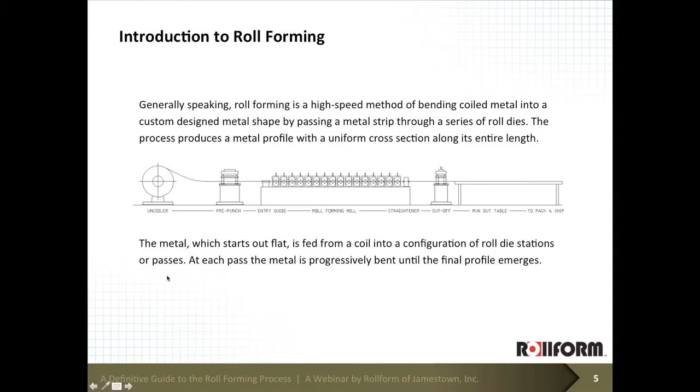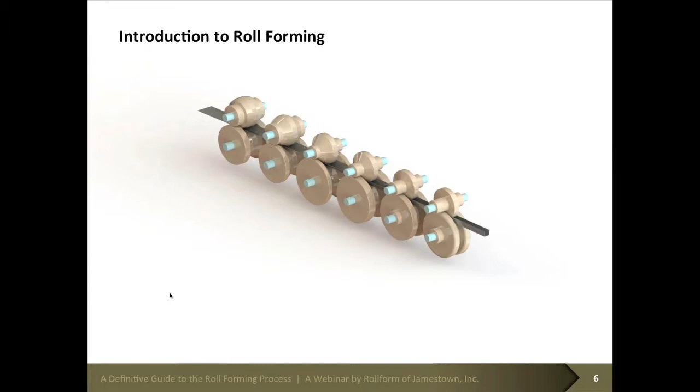Being segmented also makes handling easier for the operators. When they're going to put these in and out of a machine, the individual segments are lighter than if you had the whole top roll to put on the shaft as a single piece, and the bottom too, of course.

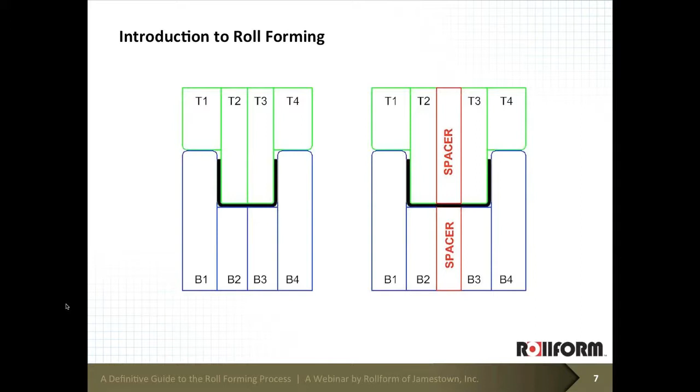It's a proprietary design, uses a servo-driven slugless cutoff. Basically, for an open shape, we can use a couple of steel plates that have a wire EDM through them that matches the profile with minimal clearance around it, so that when the die fires, the press fires, there's a shearing action that takes place, and it removes or cuts the length, the finished piece, from the roll form product, cuts it to length, and produces no slug, so there's no waste, and minimal burr, which is always a good thing. It's very intelligent, very efficient.

The die sits at its home position until it's signaled by the controls to go out at line speed to the correct position, and then very accurately cut off the product to the correct length. And then it'll come back to the home position ready for its next cut. So think about how efficient that really makes it.

Other than having to load coils or perhaps move loads of finished product out of the way, the operator really never has to shut the machine down. It's a continuous operation, flying cutoff, parts go on the load, and ready to just continue with his production.

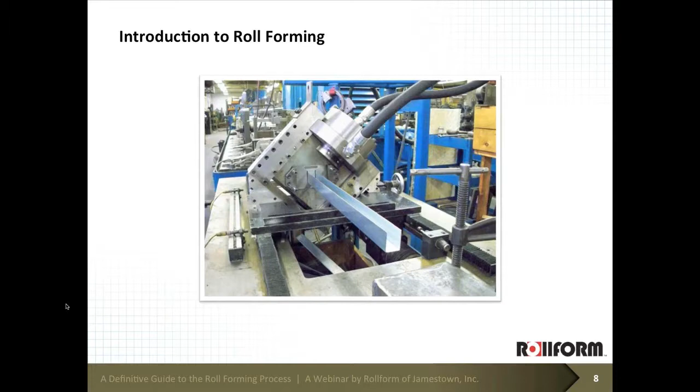When we're changing part lengths, it's really something that we can do on the fly. Quite often we can just put a new length into our controller for the line and go from 48-inch parts, let's say, to 60-inch length parts without moving a physical mechanical stop or anything like that, because we're running a continuous production from coil and cutting it to length.

Material handling and saving on floor space, they both kind of go hand in hand. If you think about the line that we just described, a coil of steel goes on the entry end of the mill. Operations take place in the pre-punch, perhaps forming through the mill, perhaps additional operations in a post-punch and or the cutoff. And out the end comes a part that is a net part, basically finished with all its features included, generally speaking.

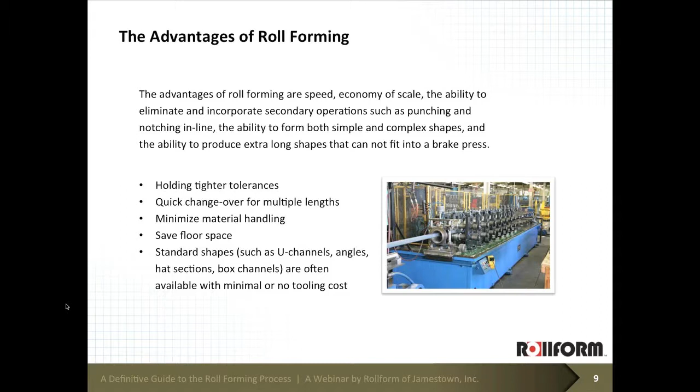When you think about what goes on here, at times for very simple shapes, we can set up a machine in a few short hours. But more complex shapes, you may have a day or even 2 days at times into a setup. So if the production quantity is very small, all that setup time, along with any setup scrap generated to perfect the part during the setup, has to be amortized across a small production quantity, which can drive the per piece price up.

The other thing that's a factor here is potentially higher tooling costs. For a custom shape, that could mean an entirely new set of tools, which could be expensive.

On the other hand, many times when more conventional forming and fabricating methods are used, there are multiple dies and multiple tools that have to be built, each one in its own press and its own operation. Where with roll forming, we can quite often incorporate a number of features in our pre-punch operations, either by gagging, actuating features in and out of the die as needed. In some cases, we have multiple stations in a single die that are individually activated by hydraulic cylinders. So higher tooling costs, not strictly true, but at times it is. That's one thing that would have to be taken into account.

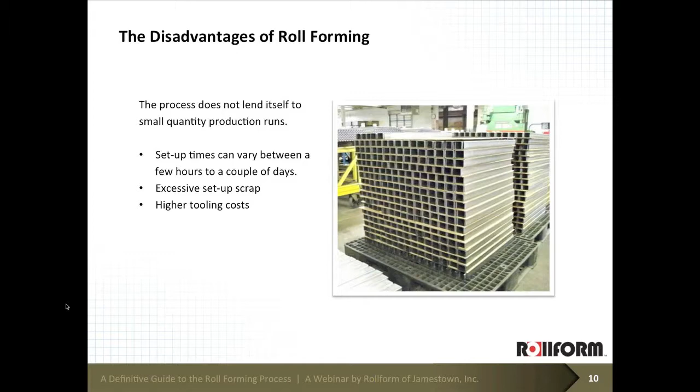And of course, there are times certain products just can't be produced economically other than by roll forming. So the good thing is just let us take a look at it and see where we can help you with that. And we'll hold inventory when it makes sense.

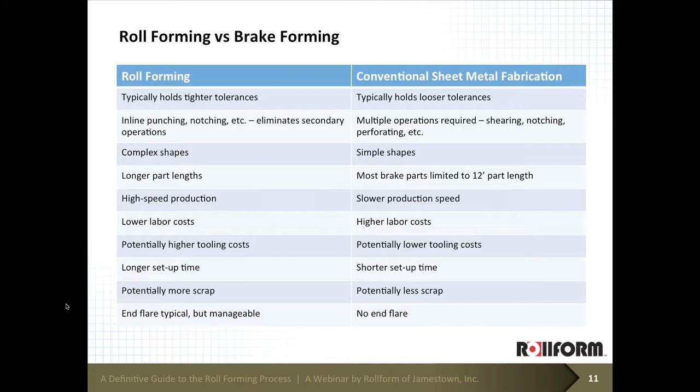We're going to go on now, Alan, to the next section here, guidelines to consider. These are some things that if you're designing a product and looking to have it roll formed, or perhaps you've got an existing product and you want to convert it to roll form to take advantage of the efficiencies of the process and reduce cost, these are some things you should take into account.

Now, these really are only rules of thumb. They're only guidelines, not hard, fast rules. Pretty much everything that we're going to discuss over these next several pages, there are exceptions to them, and many exceptions. So all we're saying is take these things into account, and where you can design around these guidelines, you're going to be benefited when it comes to roll forming your product.

So let's take a look at the first one. This is a wide panel, what you might think of as like a roofing panel, metal roofs. You see those quite frequently on residential and commercial buildings these days. I saw a metal roof on a building yesterday when I was out walking around the local community college, and what I saw when I looked up at it was waviness, or oil canning as it's commonly called, up the center of each of those metal panels. That's very common with wide panels. You get much over 5 or 6 inches, and especially in the lighter gauge stuff, the center is going to wave.

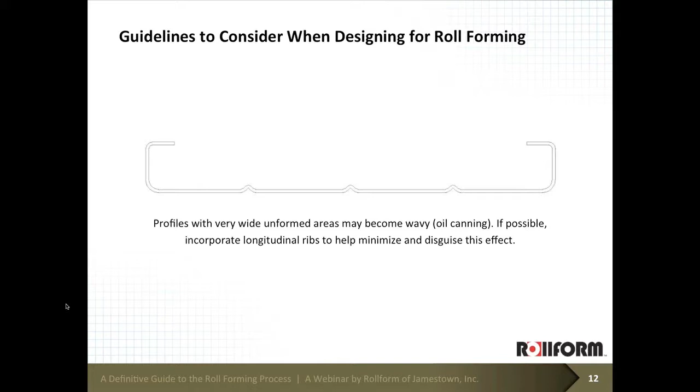What we're showing in this illustration is a J channel. It could be a cap for a molding or a panel. Quite often, all the forming on this type of product is done only on one edge of the stock, and the other side is left unformed. Depending on your use, you may see the unformed edge get some waviness or buckling to it. If we can add a safety edge, a little hem, or even a slight bend to that, it tends to take care of that waviness along the edge. Depending on your usage, maybe it matters, maybe it doesn't. If that unformed edge is hidden in the final installation or assembly, then perhaps it's nothing to worry about.

J-channels are roll formed all the time. However, if it shows, then perhaps at least consider putting a slight form on the edge, where in the bottom illustration we said not recommended. We'd like to see you try something similar to either of the options shown up above there.

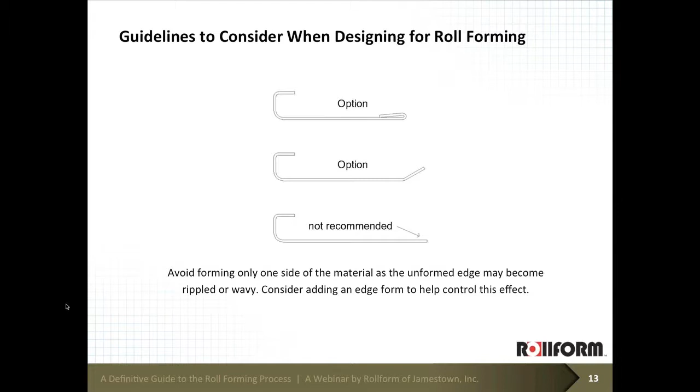Our next page, we're showing basically an end view, a cross section of a little box channel, and the arrows point into the bottom bends here. We'll call them blind bends. What can happen is those bends—it's exaggerated here in this drawing—but they can actually become a little less crisp or softer than what are formed at the top of this part.

There are ways to work around this. If we know the bottom bends are critical and need to be very crisp or square, there are things we can do in the tooling to make that happen. On the other hand, if it's not important to you—say this is just a stiffening product and it's hidden from view—maybe those larger radii don't matter in your particular use. If they do, though, be sure to call that out so we can make some provision for that.

All that happens is at the point where the top bends cover the bottom bends, you no longer have access with the male tool directly to the inside of the bends. They tend to round out and get soft. Again, it depends on your application whether this is a big deal to you or not. The prime thing here is just let the roll former know whether that's something you care about or something that really doesn't affect the final use of your product. It's a good discussion to have.

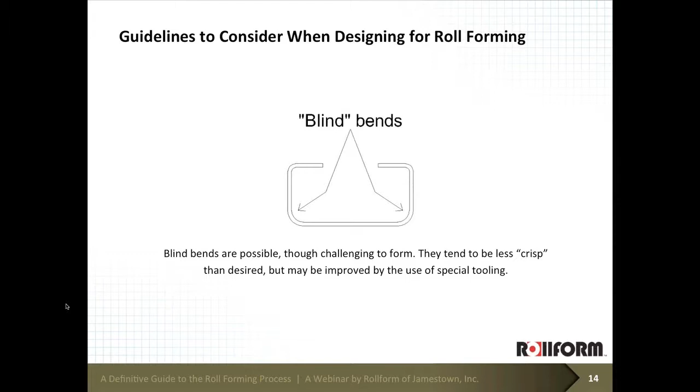Let's move over to our next page, Alan. You'll see here a couple of different variations on a theme, closed channels. The top is a rectangular square tube with an open or butt seam. The lower one is basically a variation of that, where we end up with two rectangular tubes at the extreme left and right of this roll form section.

When we looked at our slugless cutoff, the servo-controlled slugless cutoff earlier in this presentation, that's a nice open shape, and we can put a set of crop-off, shear, slugless—whatever you want to call it—plates into use to cut those products off. This product, either one of these, would not lend itself to that because there's a hollow area that we can't get any tooling to support our cut. What will typically happen is there will be some deformation from the cutoff, especially when the blade enters the part. Imagine a blade coming down into the seam of that top square channel—it's going to deform the top until it starts to make the cut. Something similar happens with the bottom one as well.

The one at the top, we actually have a customer we make this product for all the time, and we're running 20-foot lengths for them, which they recut by saw so they can cut off the part that is damaged beyond their use. They just take into account that there's going to be some of this product they can't use because of the crushing of the end when it's cut.

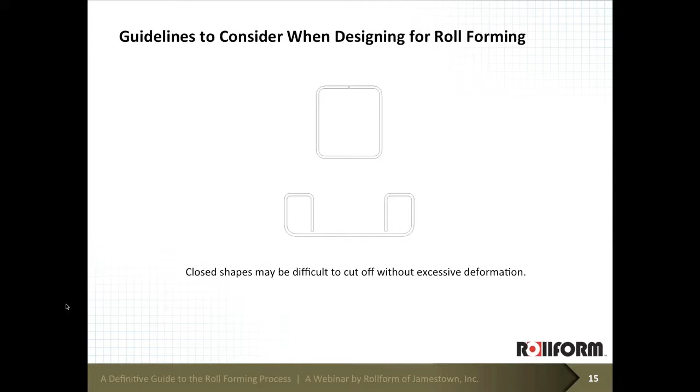Our next page, here we see a nice open section, kind of the opposite of what we just talked about in the last shot. A nice deep U-channel, which certainly is a roll formable product. What you get into here as the section gets deeper, you also get into higher tooling cost.

Imagine a wide strip of material that would be required to make this channel. If this is 6 inches deep and 2 inches wide, you're looking at approximately a 14-inch wide strip. Well, you've got to have roll tools that cover that and start the bends, and it takes more passes to finish these long legs than it would if the channel were shorter. So generally speaking, the deeper the product, the more expensive tooling gets.

Sometimes you just don't really have a whole lot of choice. You need a deep channel, you need a deep channel. But many custom roll formers are not going to have necessarily a set of roll tools that will go indefinitely deep. Here at Rollform of Jamestown, we generally limit ours to 3.5, perhaps 4 inches, because of the mills that we have here.

So you're also limiting your options on what existing universal channel dies may be available. Now, all that said, can this be roll formed? Yes, and it is every day. Just deeper means more expensive from a tooling standpoint.

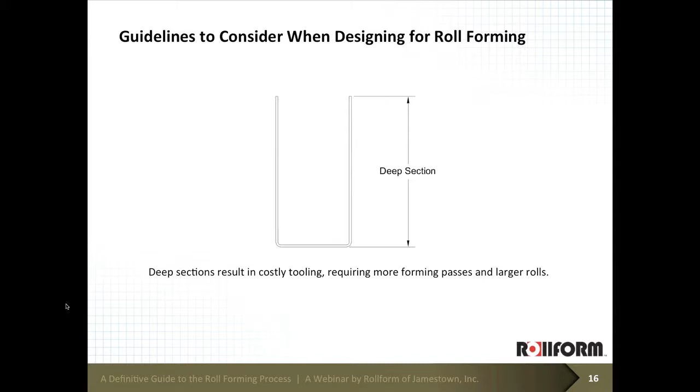Next page here, just some things to keep in mind when it comes to tolerancing your drawing. Like any fabrication process, roll forming works with coiled material or blanks in some cases, but we still have the material thickness tolerance to take into account. Typically what happens is roll forming forms the metal around the male tool, which is the inside of the part, and so inside dimensions are actually more consistent, whereas the material thickness variation shows up on the outside of the part. If you can, and it's practical, to dimension to the inside of your channel, you'll find that the variation is much less than measuring to the outside.

Now, having said that, there are things we can do. If it's an outside dimension and that's really critical to you, we can put control passes in there to control, let's say, the width of this channel, regardless of the material thickness variation. We just need to know that up front and have the part toleranced appropriately so that the tools and the process meet your needs.

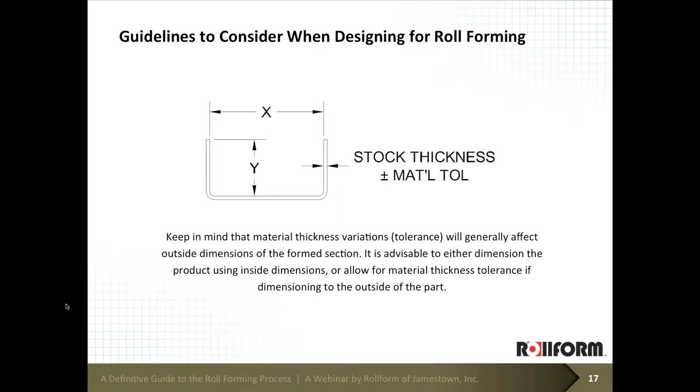Next page here. This is one that's pretty important when it comes to roll forming. Quite often you'll see a C-channel or a little box and some short returns, or ears as we often call them. There's kind of a limit there. If you can maintain a minimum of 3 times material thickness as the dimension for the straight segment of the ear, it makes a formable part.

If it goes less than that, it becomes very difficult to form, especially as the material thickness increases. Just imagine that you're actually using, in effect, a lever to make that bend in the rolls, and there's just not enough to make the bend. It won't grab it and make it form crisply and evenly. Sometimes it'll even damage tooling if it's heavy gauge or high strength and the bends are just too short. So here's the rule of thumb: 3 times material thickness as a minimum on the straight segment of any returns.

Even if we can make it with a bend less than that, it's going to be real hard on tools and shorten their life. There'll be a great deal of tool maintenance and repair that runs into some money, and of course, as it wears, it's harder to maintain the integrity of the part.

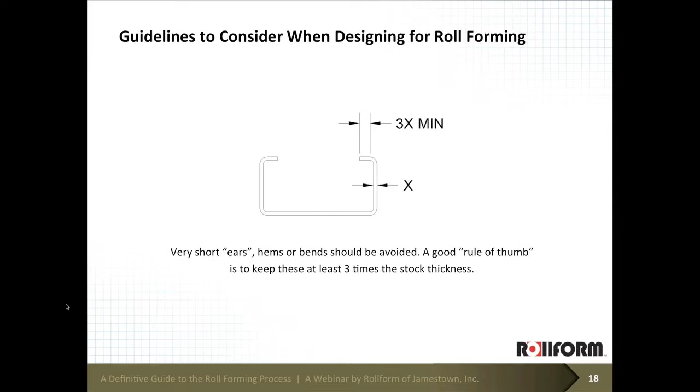I saw a job once where we formed it up very close to what's demonstrated here. When it exited the last pass, the whole thing opened up so it was nearly flat again. Can it be done? It can be, but quite often rather than one single true radius or arc, it ends up being a series of shorter bends and lines, almost like faceted, as opposed to a true radius. It's generally a series of shorter straight bends that will simulate an arc. So if it's high strength material, something with a lot of spring to it, stainless...

Pretty tough to do. Just so much overforming is required that it's very difficult to make that unless it ends up being faceted.

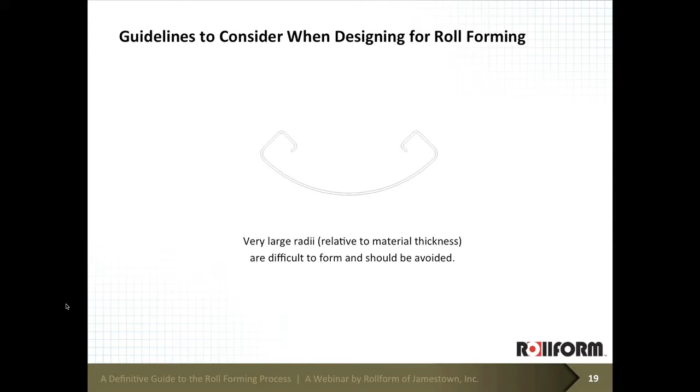The problem is not that you can't make the part. They are certainly roll formable, but it's very hard on tooling, both in tooling production. If you can imagine, it would have to be quite a narrow, skinny slice of tooling that would have to go down inside these channels to maintain the opening while the part's being formed around it. Those tools are challenging when it comes to heat treating. They like to warp, they're that thin. They're also difficult as you get into heavier gauges to keep from fracturing or cracking.

We have this one particular job where that's what happens. Every few runs we have to replace some of those center slices because they fatigue and crack. There's a lot of side pressure, not much tool left there, so they crack, and it just becomes a consumable part of our production run. We keep spares on hand.

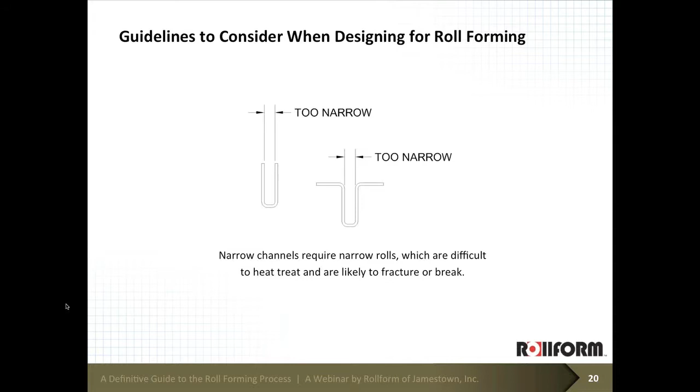So, very narrow channels - yes, it can be done. Just be aware that there are some tooling issues involved. We will certainly work with you to work through whether the material gauge, the material properties, and the channel width are appropriate, if they all fit together.

What we're recommending is to keep these features as much as possible away from the bend lines and away from the edges of the stock. It doesn't mean they can't be there, but if they are, there's potentially some distortion to the feature itself - perhaps the hole changes shape as it goes through the roll forming tools. Even the cross-section of the part can be compromised because there's just not enough strength in the places where you need it, in the bends or along the edges where the material is flowing through the rolls.

If you have to have, for instance, that little cross section we showed - I think it was our last slide - that had a hole in the web, if that hole were to be pre-punched, which odds are it would be, and then that hole had to be registered an exact distance from the end when it cuts off, that's also a determining factor for line speed.

Now, what I've been talking about so far is gross line speed. That machine's running at 100 feet per minute, so when it's running, it's producing 100 feet of product per minute. But obviously, as there are adjustments that need to be made - coils put up as one runs out, loads moved, things like that - your net line speed is going to be significantly lower than the gross line speed.

The other thing is heavier material. When you put up heavier coils, those coils have fewer feet of product in the coil. So you run out the material and then you have to either feed or weld on an additional coil. So thicker product also will impact line speed and your net.

Well, I'll tell you what, the next question then comes from me. I'm curious, has it changed much over the years? We mentioned before that Rollform has been doing this since, I think, 1951. We don't necessarily have to go back that far, but has the line speed increased significantly over the years? Has it become more efficient in that way?

I'm not so sure the line speed itself has been the big improvement. I think it's probably controls. Years ago, when I first started, everything had a mechanical trigger where you had to pick up on a punched hole or feature in the part, and everything was pulled back with door springs to get to the home position for the die. A lot of mechanical stuff going on that you just couldn't speed up, and so consequently back in those days you ran a slower line speed and you produced a lot more scrap.